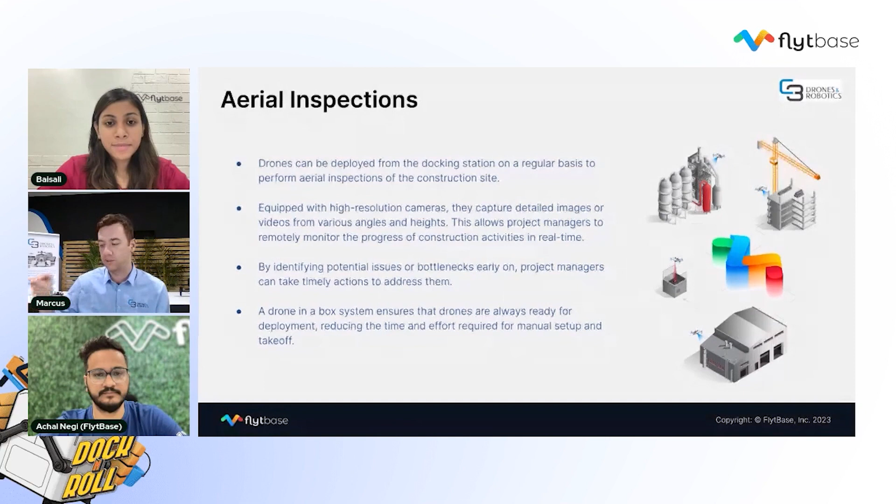The high resolution cameras on the M30 are perfect for this. You can even zoom into areas you might not be able to fly into, and with the amazing camera capabilities, you can see all sorts of different areas and monitor them.

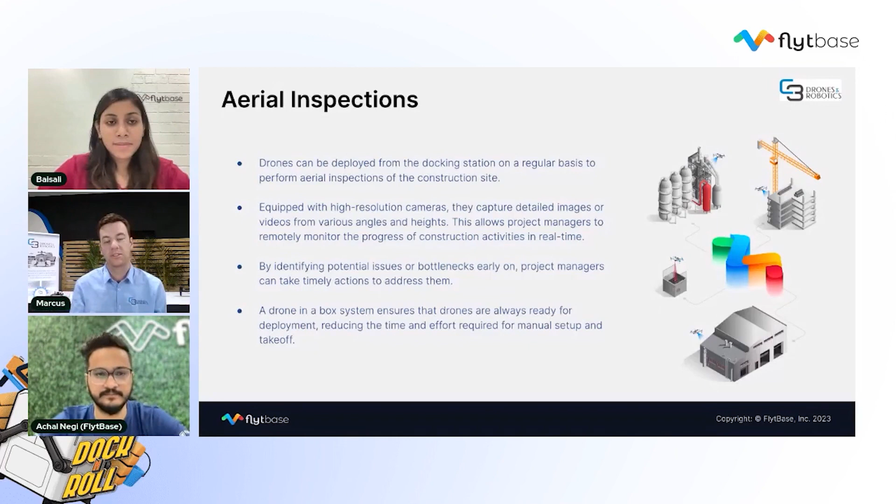I guess this also comes into stitching things together and creating that digital twin, and monitoring a lot of the machinery as well on site that needs regular inspection. And moving on to the next slide.

And then if you had a system to go around, even when you're starting to put walls up and get your construction going, you can do internal and external inspections regularly with the drone, building that digital twin. You can then organize operations on site.

You might have electricians, builders, all those different groups that come into a construction site. You might be able to organize them more effectively and have groups going to the right places at the right times using something like a digital twin.

And then surveillance - like I said, even when I was on site, one of the managers talked about surveillance being an issue. So the drone's there when nobody else is, and if you set it up with a remote operations center, it's really the perfect use case.

It could take off regularly, doing a predefined mission, and then you could break out of that mission, go, oh, what's over here, switch to thermal, zoom in - there's various aspects you could focus on, but basically just the presence of the drone will provide quite a deterrent factor in itself.

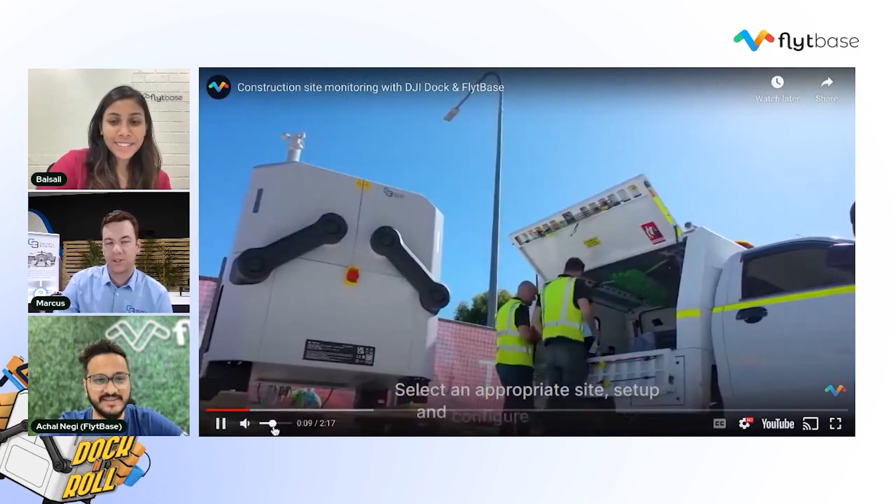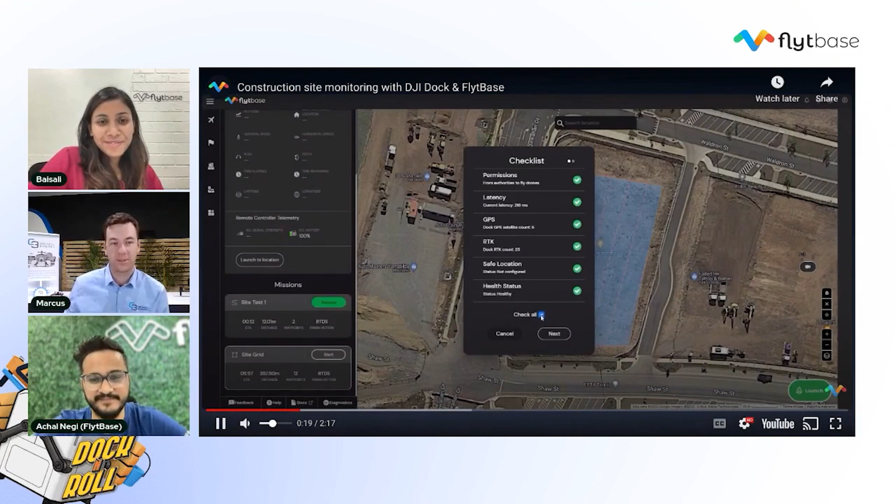Sure, maybe Marcus, you'd like to. Yeah, sure—we're just operating out of the back of our truck there. It was a really easy setup. We just offloaded the DJI dock out of a trailer, walked through the steps on the controller. FlytBase was already paired, and we set up a grid mission here and went through the checklist. Really, it was as easy as that—the drone took off and started collecting the data.

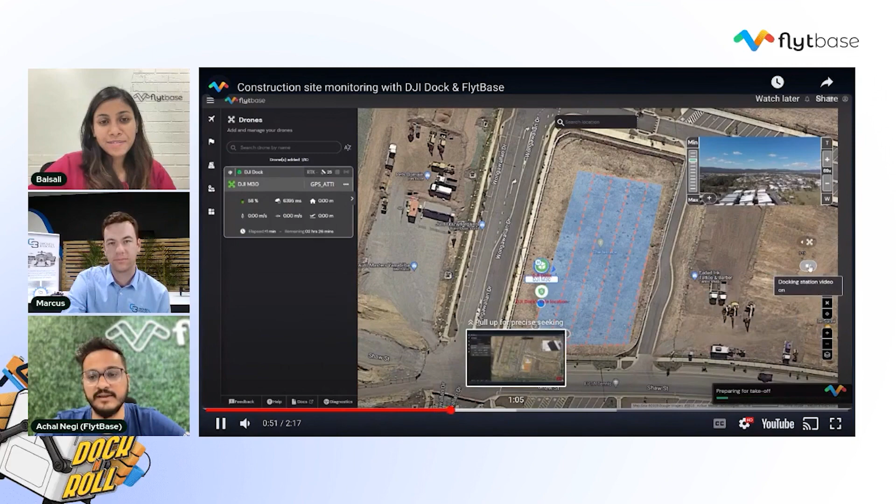So what you see here is the drone flying from the FlytBase dashboard. You see the real-time video feed from the docking station, from the drone camera. It might look a little bit laggy because of the live streaming, but you get the live HD video feed on the dashboard.

You can see the live telemetry, where the drone is flying on the maps, the live location. On the left you have the DJI dock telemetry coming in. We can enter into the cockpit view where you can see that in great detail, as well as the mission progressing. You see two icons on the map, which is the home location and the safe location.

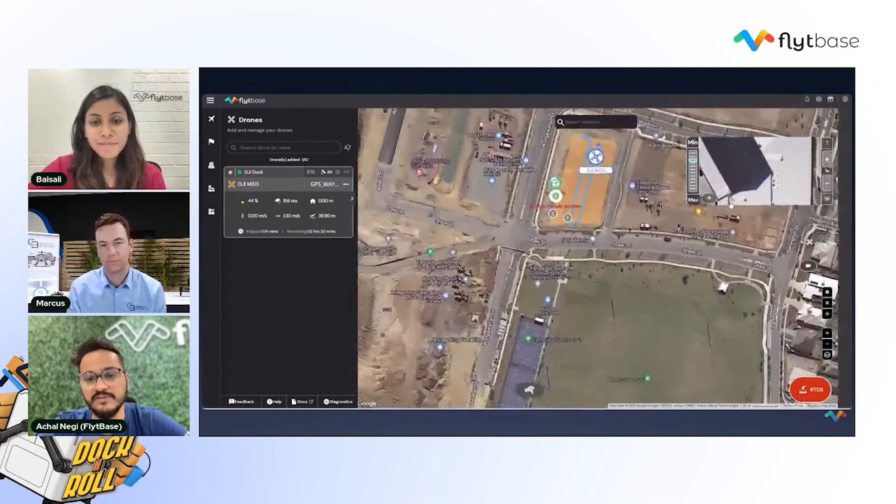I'd just like to share about the safe location. So every dock has a safe location. In case something happens to the dock, the drone would come back and land.

You can of course use the zoom capabilities on the dashboard for the drone. It depends on the drone, the drone should have that. If you're using a DJI M30T, you could also switch to thermal video feed for that. And once the mission is done, the drone will come back and land.

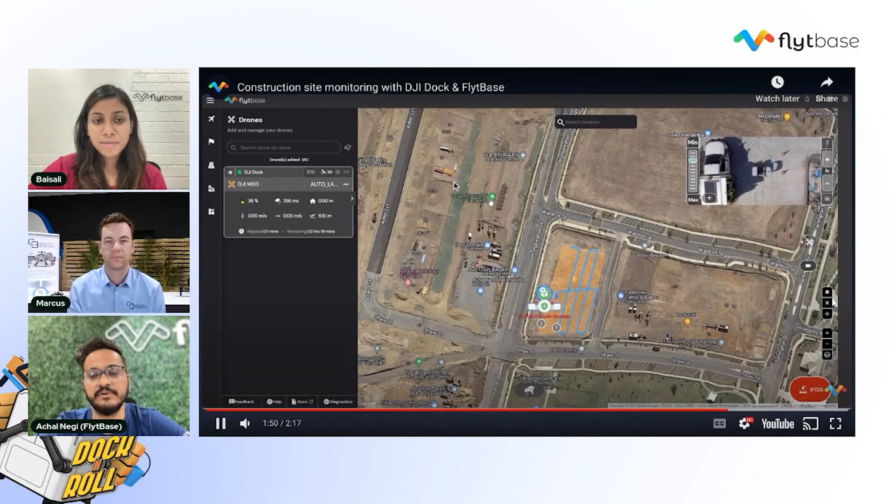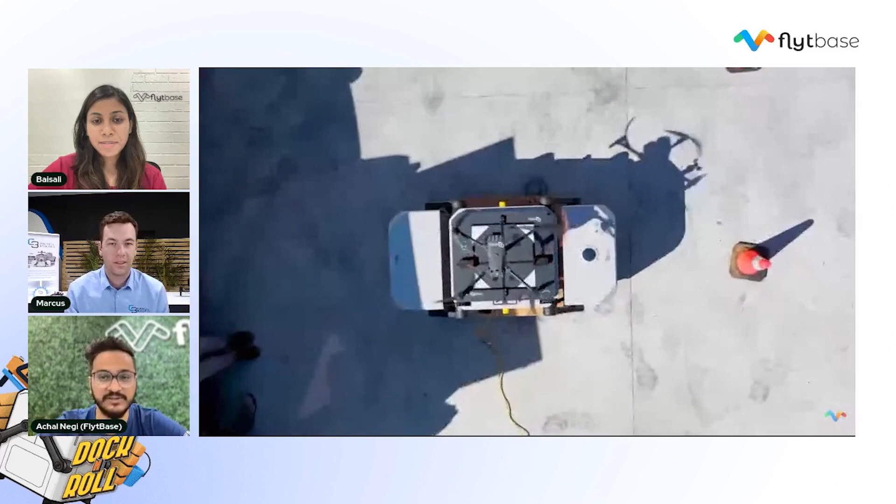Maybe Marcus, you'd like to share about the precision landing bit that DJI has already done, and how well does it work? How has your experience been? I think there was already a question in the chat about that. Yeah, sure, I did notice that.

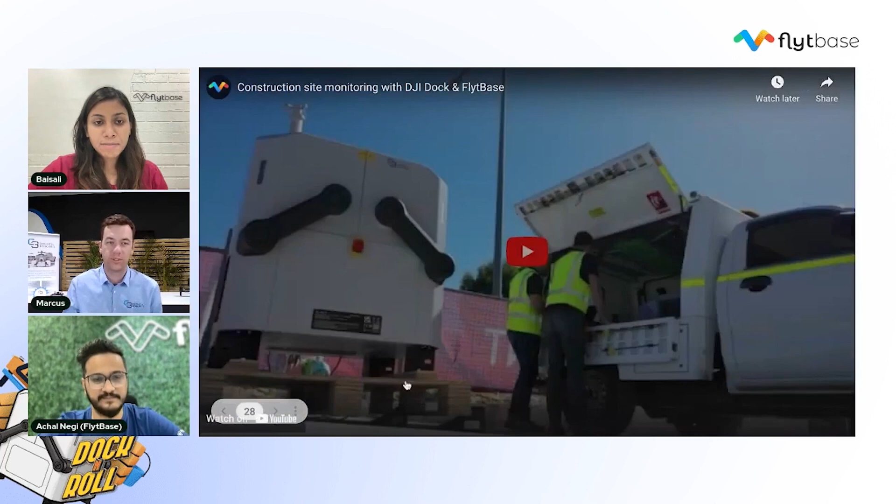There's kind of two things that they work on from what I understand. There's obviously the system, the drone and the dock both use RTK, so that's kind of GPS correction. That allows for 1 or 2 centimeters level of accuracy. It also means that the dock, once it's set up, it's best not to move it, to maintain that level of accuracy.

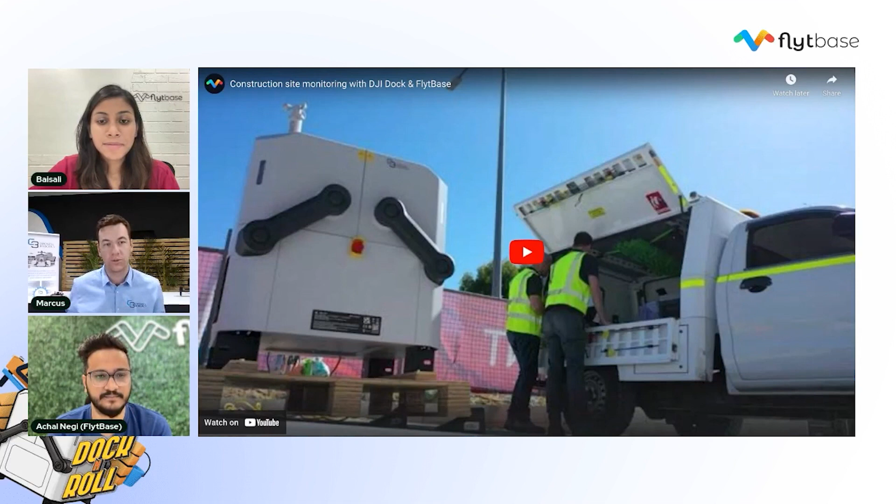But once you set it up, from what I've seen, it could almost land on the dock just using that system. But what else you'll notice is when the drone comes in to land, the camera looks down and it's using the vision system to line up with those white triangles. You would have seen at the end of the video there's 4 white triangles on the base of the DJI dock, and the vision system is actually in collaboration with the RTK, making sure that the drone really centers down into the center of the docking station there.

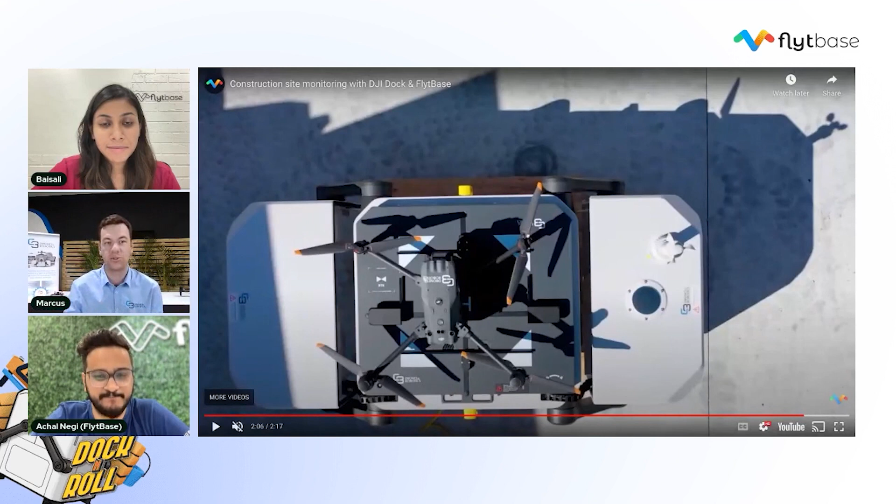From what I've seen, even in a reasonable breeze, you can see the 4 white triangles there - even in a reasonable breeze it was right in the middle, within 5 centimeters of the middle of the dock. So very impressive. Even if it's really windy, right on limits, and it lands a bit off kilter, you can see when we press play on the video that the rods are coming in, positioning the drone anyway. So they've accommodated for everything, and from what I've seen, it's a really robust setup.

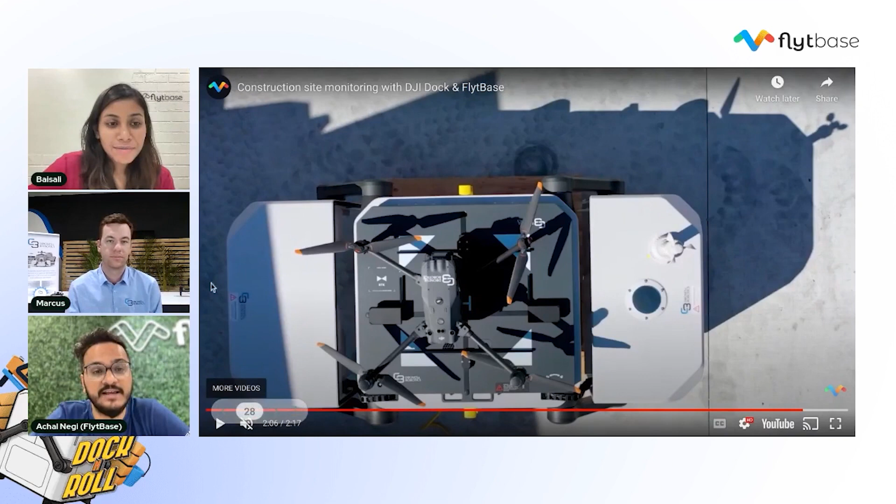Great, maybe we can move to the next one where we'd like to introduce the updated things. So we'd like to talk about this. So far, of course, we had a process where you can integrate DJI dock. It used to take about 15 minutes or so, or half an hour to integrate it.

Now, today we are announcing a new device registration flow, which would be completely automated, where you do not have to talk to our customer support team to integrate a new DJI dock that you have. So we are launching a new device registration where you'd be able to sign up, you'd be able to link your dock really easily with just the process workflow. This has been designed as we're seeing more and more docks coming as commercial shipments are getting started. So this is something really useful for our partners, for end customers to get started with the DJI dock. So this is coming in FlytBase now.

Thanks, Achal. Marcus, just because you've done all the setup in Australia, how is the setup of the DJI dock as well? How simple is it? What are the different site requirements? What should people make sure of before they're thinking of investing in a DJI dock, or what different parameters should they consider?

Yeah, sure. So from what I understand, it's a fairly easy process to walk through. I think I'll just touch on the DJI side first, which is basically we did some training with DJI themselves for this, but their preference would be that the dock's mounted on a nice solid concrete pad.